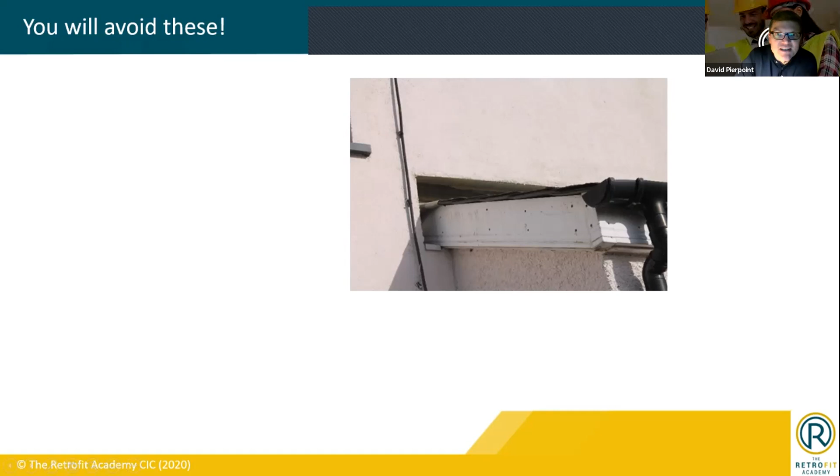And what I always say when giving presentations like this is, if you haven't noticed before, drive around any council estate that's had a reasonable amount of retrofit work done on it, and you will see many of these things. You will see what were bright yellow walls a few years ago slowly turning black, and it's thoroughly depressing. So that's why we have a need for this standard.

Now, I hope you'll just indulge me for a couple of minutes here. I'm going to show you a short video. It's only a couple of minutes worth. This is actually the trailer to something we created called PAS 2035, the movie. And we used this last autumn to, well, we used the whole movie, but this trailer was used to promote a series of clinics we ran with local authorities who have been given a lot of money by government at the minute to invest into retrofit projects. So I think it tells its own story, and we'll revisit it in a second.

Faced with the challenge of a generation, two local authority officers and their contractor have a meeting. At stake, should they adopt PAS 2035 or not? A story of memos, a story of funding, regulations, and concerns about the cost of compliance. About embracing change and building trust. Will they make the leap into the unknown or stick to what they know? Will they ventilate or prevaricate?

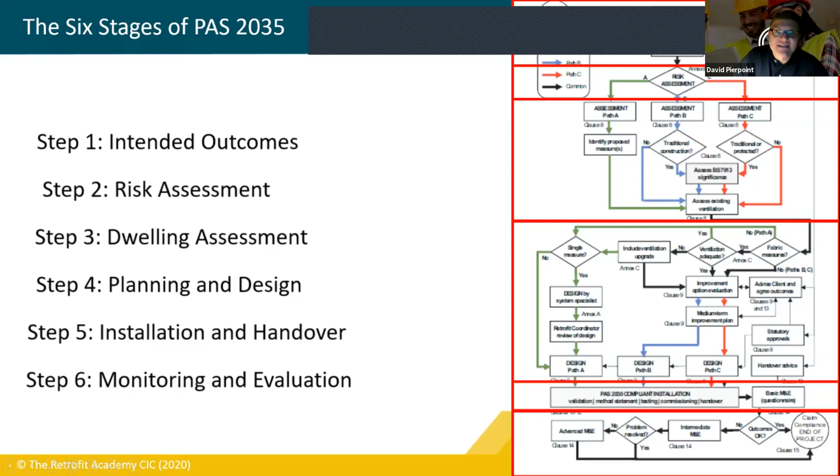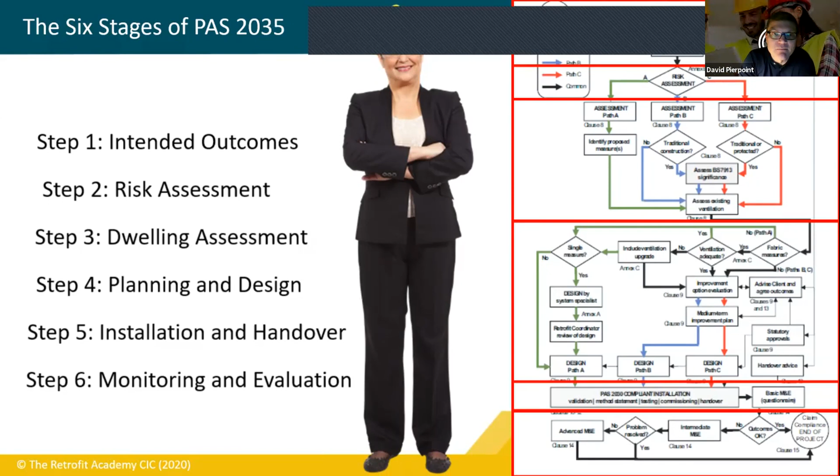I won't go through the detail of that today. It's a couple of hours' worth to do that. But astride it like a colossus is this person. This is Joy, our retrofit coordinator. And it's Joy whose job it is to apply this standard.

PAS 2035 introduces 6 roles that are to be fulfilled on every retrofit project. Some of them are fairly light touch. So a retrofit advisor, their job is to give some good advice at the beginning of a project normally. A retrofit installer, it's their job to carry out the work. A retrofit designer, it's their job to do the design work.

An assessor to carry out the energy assessment, the building assessment. An evaluator at the end of it to make sure it's done what it's meant to do. And then there's the retrofit coordinator character, who links everything together, and I'll explain how. Now, PAS 2035 says that they are a specialist retrofit project manager who takes overall responsibility for overseeing the assessment of dwellings, the identification, specification, and evaluation of energy efficiency measures in accordance with PAS 2035, right?

So it's their neck on the line. It's their professional responsibility. There is an ethos that underpins that, and that is that they act on behalf of the public and the client's interests. So now that is a challenge, to say the least, and it suggests that there's a degree of independence about a retrofit coordinator, which we'll revisit in a second or two.

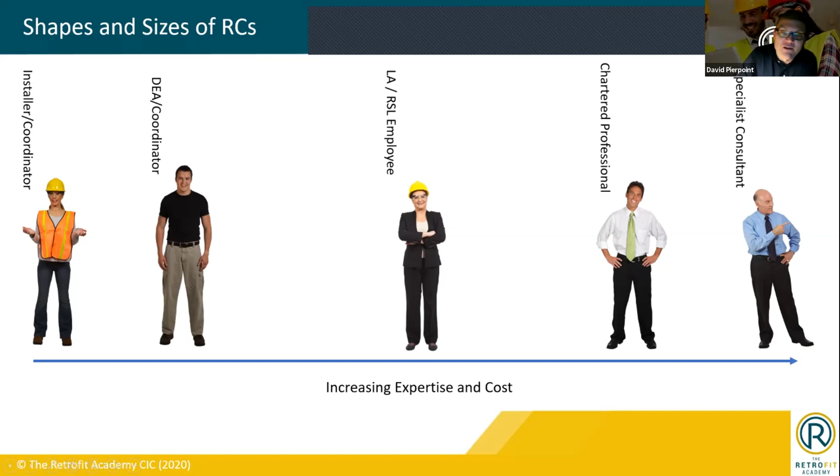And then there's many of you as chartered professionals for whom this role was first conceived, it should be stressed, who really know what you're doing, but you are a bit more expensive because you're in university for 5 years and all that sort of good stuff. And then there's these very specialist people in areas like vulnerable and traditional buildings, but we won't get hung up on them. And then we talked to them about local authority employees themselves becoming retrofit coordinators. So chartered surveyors, architects, and the like who work for local authorities. And we felt that that was a really good option where it was viable.

Okay, so that's the role. That's the information about the PAS. I'm just going to give you one slide's worth on the retrofit coordinator diploma itself before I hand over. So it's a regulated qualification. The awarding body there, the Open College Network West Midlands, that's who you get your certificate from, and they're regulated by Ofqual, which means we're kept on the straight and narrow. The Retrofit Academy is the only provider of this qualification, and we developed the qualification and know it inside out.

It is required by PAS 2035. So there's a section in there that says every project needs to have a retrofit coordinator, and it says that every retrofit coordinator must hold this qualification. And as the only provider of it, I can tell you that we've got around about 800 people enrolled onto it at the moment, and we have 230 or so graduates. So our objective was that by the end of this year, we'd have 1,000, hopefully in practice, not just in training. So a long way to go, but we're making good progress.

Now, we've come a long way. It started off as an excellent course that gives you all the theory you possibly need to know about moisture risk and thermal performance and building fabric improvement, fabric first approaches and whole house retrofit and all these other wonderful things that you need to know about, the building physics and so on. What we've done over the last 12 months is add into that a whole load of in-practice stuff.

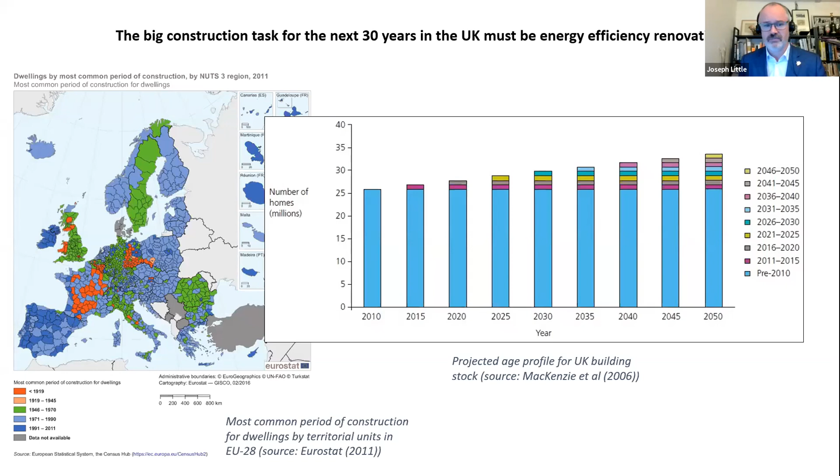We know that the complexity of buildings, particularly when we talk about solid wall, is significant. We're familiar with those heat transfer mechanisms, conduction, convection, not so much with radiation. And then we move to the mechanisms of moisture transfer within our walls. And most of us talk to some extent about vapor diffusion, how vapor moves as a gas through those porous linked structures. And then convection is about air gaps. So it's moving through the air and it can be moving at speed. And of course, that air is carrying moisture with it.

But what we don't talk so much about is capillary action and surface diffusion. So capillary action, where literally the straw or the pore, to use an analogy, is fully filled and liquid water can move really quite fast through it. And then surface diffusion, where, again, to use the analogy, the straw is lined with liquid, but there's also vapor moving through as well. And you can have liquid water moving in one direction and vapor moving in another direction. You can have moisture as a solid, as a gas, and as a liquid in the same wall at the same time, and even the same portions of moisture changing states through the same day.

And places like Scotland, west of Scotland particularly, and Wales and most of Ireland, where there's extremely high and consistent relative humidities, drying is a really big issue. So it's not so much the heavy rainfall. In fact, parts of Italy have much higher rainfalls than Dublin, let's say. But what we have in many places in this western seaboard of the British Isles is this fairly consistently elevated

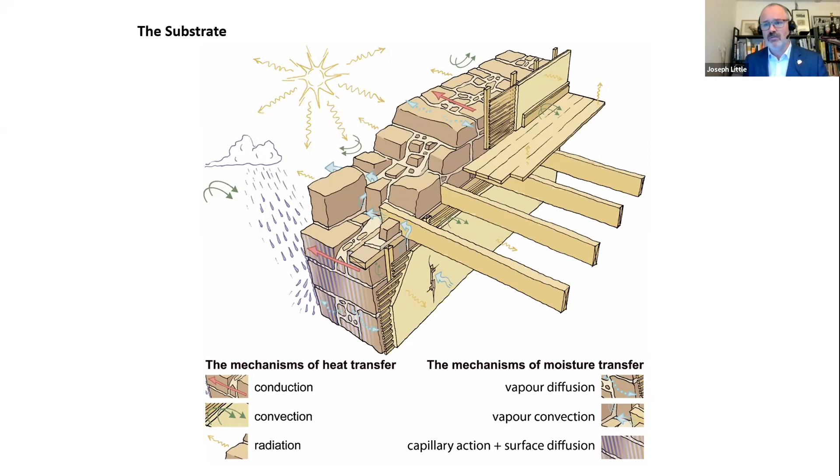And then there's the question of the heritage of the built environment and the quality of those buildings themselves. So there's lots of different concerns we need to think about. And we don't know enough as an industry, certainly building design professionals, about how our buildings are made and what those different mechanisms that affect things are. And a major issue that we want to look at is to ensure that the drying capacity is always elevated above the wetting capacity. And that can be done.

Now, I remember several years ago, looking at a website when I was giving a talk, I think in Scotland the next day, and I came across, in Glasgow, this particular presentation where some community website was very, very proud of the installation work that had been grant aided by your government and that they were carrying out, to such an extent they were showing it on their website.

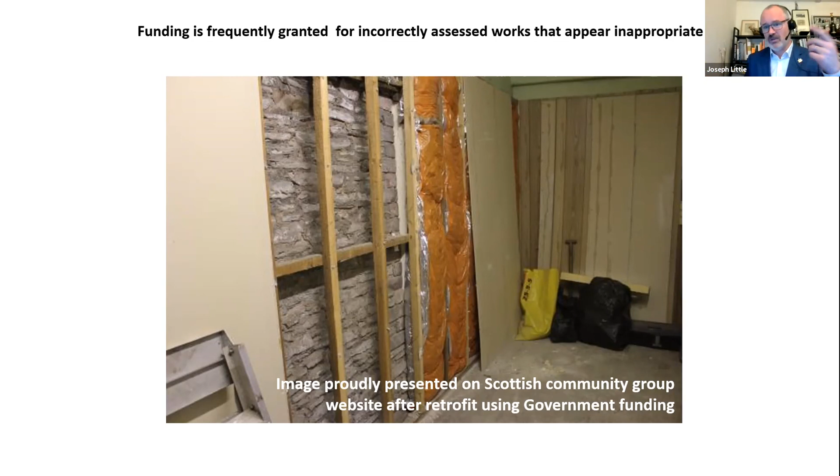And of course, this just looks scary. You've got polythene wrapped mineral wool, foil where maybe foil doesn't make sense, air paths moving around. You've got no understanding of what's going on, nothing consistent. This is an experiment. It may have some value - actually it's so bad it may not be too bad from a moisture perspective, but it won't achieve what it was meant to achieve. And it's a waste of people's money.

We also have that big thing of societal need. This is a slightly old quote: to meet carbon budgets, a further 6 to 7 million cavities, 7 million lofts, and 1 million solid walls need to be insulated by 2020. That was the ambition, 6 years ago. How much of that has been achieved in the last 6 years? I'd say very little of it.

Obviously the Green Deal collapsed since then and other things, but it collapsed because there was a lack of credibility, a lack of safety, a lack of awareness. There were a great deal of accountants involved in that, and lawyers, but not a great deal of technical people.

I'm not going to read all this out, but the implicit assumption behind all this - that all these wonderful people in the Energy Saving Trust, the World Wildlife Fund, the Forum for the Future, Greenpeace, all saying we need to do this right, and we building professionals agree - is that we have adequate information about the solid walls, that we know the right assessment methods, that the right specifiers are in place, and the completed work will always be good. That's the assumption. We know very well, even then, some of us, that there were naive assumptions. But what can we learn, and how can we get it right?

One of the things we could do is understand a little bit more about risk. What's the most risky thing you'll do today? It's probably getting out of bed. You could walk across the road. There's a big difference between risk and hazard. You could walk across the road many times with your eyes closed - I wouldn't recommend it - and you may well live several of those times, but it's very likely that eventually you'll be hit. So the hazard is dying or being injured because you've been hit by the vehicle. The risk is the likelihood of that happening and the significance if it does happen. They're different - hazard and risk.

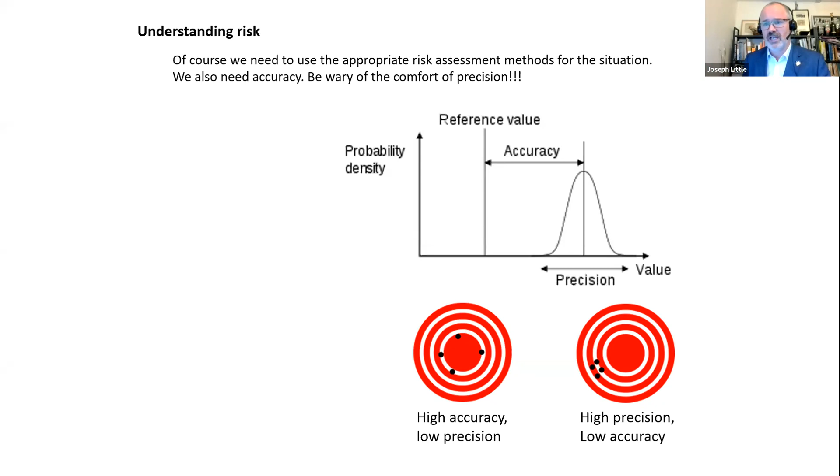So it's not for the retrofit coordinator on site, it is for the building design professional to engage with. As it happens, there is loads of guidance. Before about 2011, it was a desert to some extent. But look at what's been done by the STBA—the Knowledge Guidance Wheel, Responsible Retrofit, the Bristolian Guide, which is so wonderful, the guide I pushed out myself with my colleagues Beñat Arregi and Calin Ferraro before I came into TU Dublin, written in a context of uncertainty for Scotland, with a stone wall tenement in question.

Other things—Colin King looking at uncertain consequences, unintended consequences, and Sanders and May's wonderful document, God bless Neil May. Some of you may not know him, but he was a bit of a mentor for me, and he died a few years ago, but he was the lead author of this and so many of the other documents on the page.

And then other documents from a conservation perspective. It's interesting that PAS 2035 references BS 7913, from 2013, but doesn't reference, from what I can see, BS EN 16883, which is more recent, from 2017—Conservation of Cultural Heritage Guidelines for Improving the Energy Performance of Historic Buildings. I think that's a pretty good one to be looking at.

So that kind of guidance is not regulatory, but it's really sober guidance. What's really important is all of it comes from a building physics perspective, an applied building physics perspective—not for the physicist, but for the design professional who needs to understand this sufficiently. These documents are all coming at it from the same way, and the reason I say that is the previous generation of documents in many cases weren't.

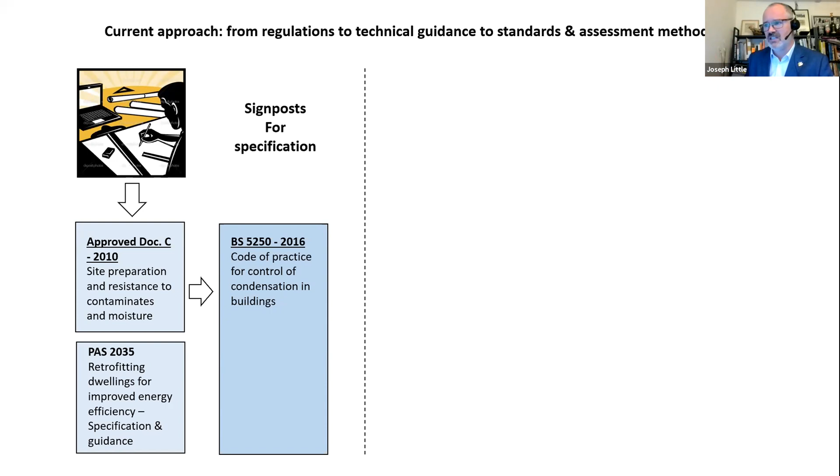So in that context of pathways, if you look at the bottom left-hand corner there, you've got PAS 2035, and there's that question - the specifier at the table saying, what do I do? What's safe? What's reasonable? And where do I look? So I imagine you might look at approved document C, or PAS 2035, or you might go across to various documents such as BS 5250. At the moment 2016 is the latest version, 2019's draft, but that might point you at different types of risk assessment - you could say there's 4 different types.

What I should say is simplified is not a simplified version of full. Simplified is talking about dew point or Glaser. It could say chalk, and full could say cheese. In some cases they could both say camembert and whatever brie. So you can't say one is a simplification of the other. But at least in the 2016 edition, for the first time, they actually said there were 4 different methods you could use. And in air dominated cases, by the way, all desktop risk assessments are abandoned, because none of them capture the significance of what's going on.

So there's guidance where it's prescriptive, and that will always be necessary, and it can be very good when used within its limits. The Glaser method under BS EN 13788 is excellent. For years I was very critical of it, but I've come to realize it's excellent when used in the context of the scope, which is on page 4 of the document, and it's limited. So use it within the limits and it's fine.

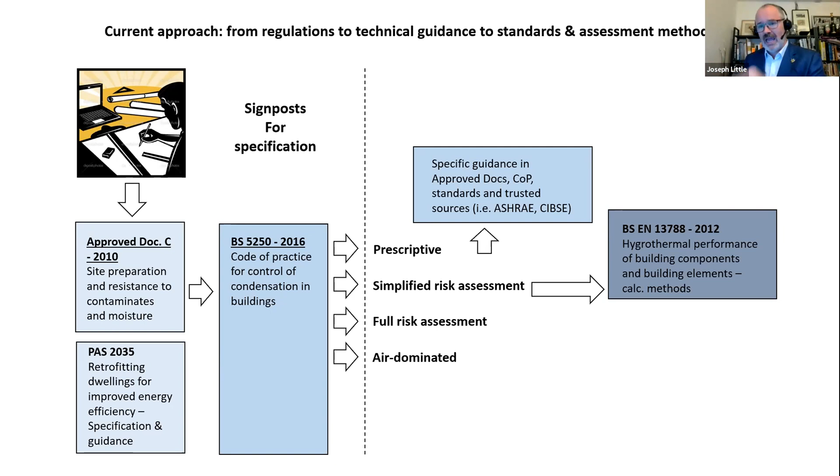The problem was, since about the 1920s, the only risk assessment methods in the building industry were the dew point method, which had all its limits. Those limits weren't fully understood, and it was used for everything. That's the problem - it's still being used far too widely, way beyond scope, and too many designers still do not read that document and establish on page 4 the scope.

So there's a thing - 15026 came out in 2007, but it was only referenced by BS 5250 in 2016. So there were 9 years where buildings were being built where the builder was saying, or the material supplier was saying, we're assessing the product in accordance with BS 5250. And that was cheeky because this standard existed, but it wasn't properly signposted in BS 5250 in that period, and people could therefore get away with it where a building design professional didn't know this themselves. So at least that's now been much corrected.

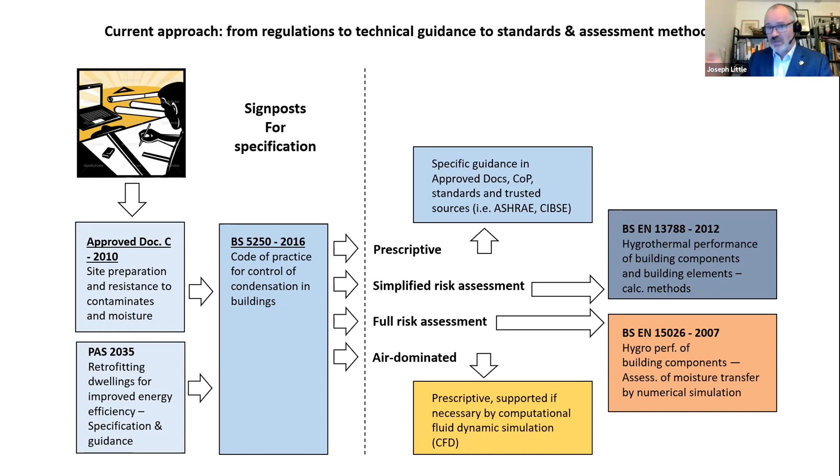And then finally, prescriptive - are you into computational fluid dynamics and so on. So these are the signposts for specification that you need to be very aware of. You don't always need to go with WUFI - you need to go with the right method, the appropriate method within scope that meets the timing and whatever else you have. But if you need to go with WUFI or dynamic, that's what you need to do. You need to do something that you can stand over.

So the Glaser method - I won't talk a lot about these things - it's about charting the temperature profile, the saturation profile, and then the actual quantity of moisture present and so on. Where they touch, you've got liquid water, Tauwasser in German.

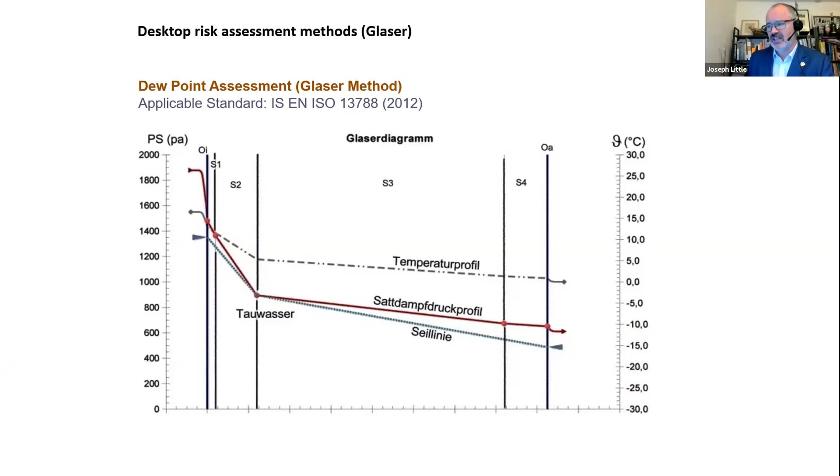So that used to be done on a slide, literally on a drawing board, and dots were charted and literally lines were drawn. It went back to that kind of really sensible, robust, but very limited assessment. It's a calculation, it's not a simulation. That's important. You now can, under IS EN 15026, carry out, I wouldn't say it's a simulation, it's not a dynamic simulation, it's a numerical simulation. So it's a calculation for every time step.

And you can set up different cases very quickly. You can see on the red area of that brick wall there, monitoring positions being introduced. You can throw things around very quickly. You can introduce your own material files. I'm showing you a screenshot of WUFI, but Delphin is a bit more complicated, but is also validated to that standard. It allows you to take account of the orientation, the inclination, different climate events, local climate issues. It allows you to take account of failure.

So, there's a break in a window reveal wall seal. What happens if a certain amount of driving rain gets in there? What happens if the airtightness membrane isn't perfect? All those sorts of imperfections and conditions, construction moisture on the day that the racking board was laid, or whatever, all those things you can actually allow for and assess parametrically.

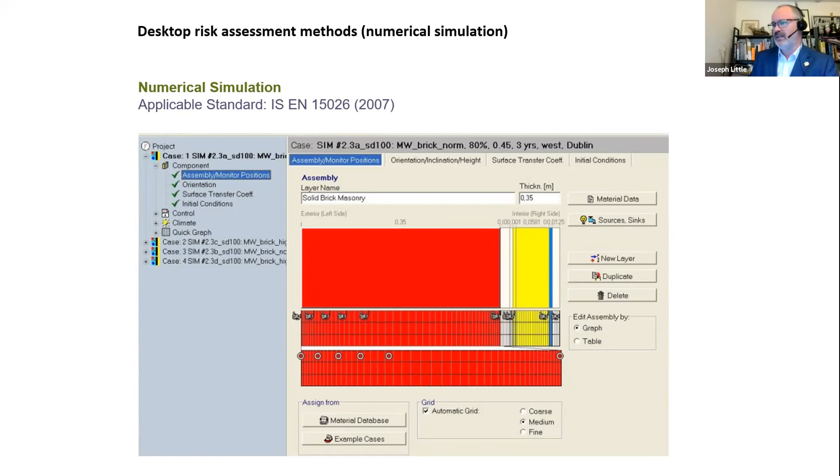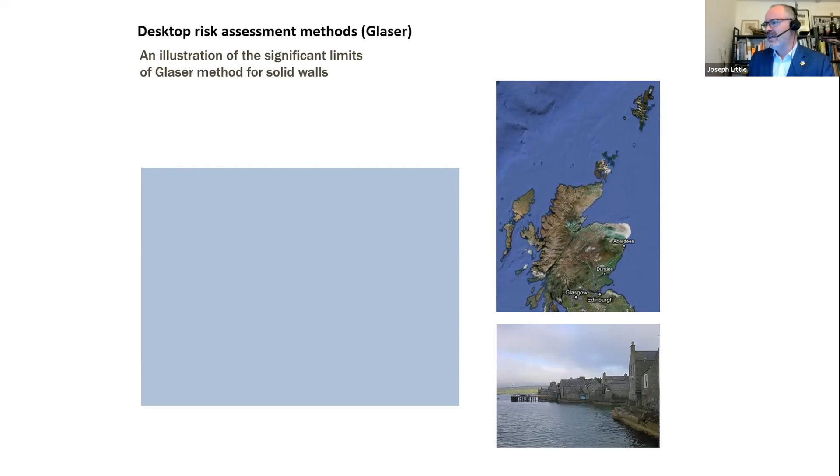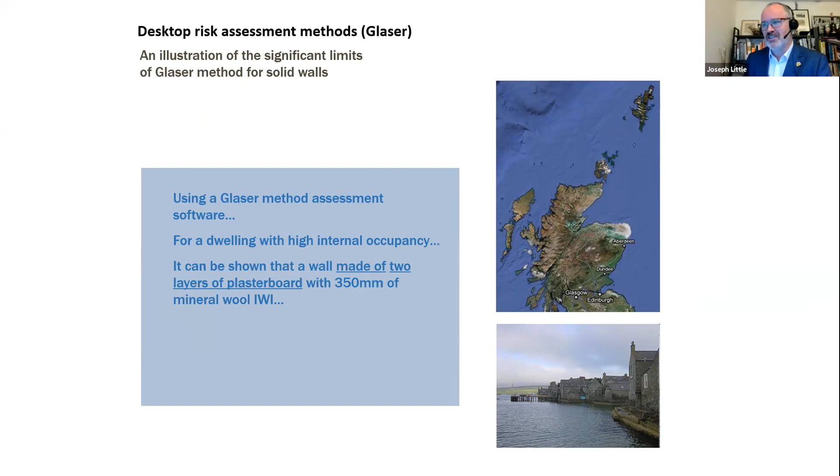Compare that to the dew point method, and I love this example, which is a bit mean, but you've got, I think, Lerwick in the Shetland Islands, in the north of Scotland. If you took a Glaser method or a dew point method calculation and you looked at a building with high internal occupancy, it could be shown that a wall made of 2 layers of plasterboard with 350 millimeters of mineral wool, so this is silly, I know this is silly, will actually pass a Glaser method calculation if it has a VCL on the room side.

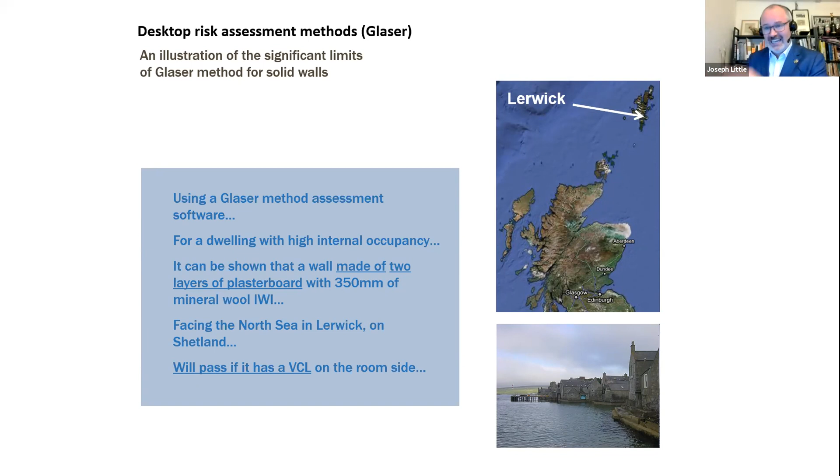And that's because a Glaser method calculation only takes account of the moisture from inside. It takes no account whatsoever of the moisture outside, other than its relative humidity outside. Rainfall does not exist in a Glaser method calculation. Radiant sunshine does not exist in a Glaser calculation. Only ambient conditions in temperature and humidity, and then obviously the conditions within that material buildup itself. So that's not valuable, that's not useful, that's dangerous. To be able to say to somebody that that's going to be a safe buildup when clearly it's a dreadful buildup and will collapse.

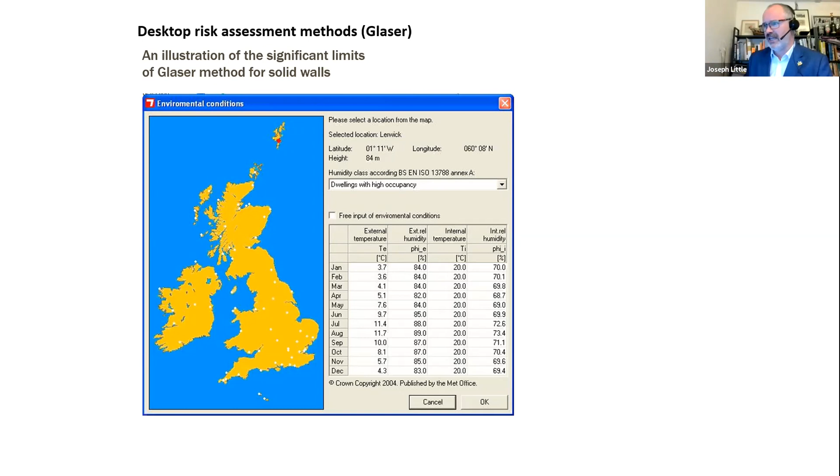Just to kind of prove that, I'm using a bit of software. It happens to be BuildDesk. Like I said, it works fine when it's used within its limits. There's a dwelling with high occupancy. There's Lerwick at the top of the screen. There's the external or the boundary conditions, internal and external. There's the wall assembly, all properly chosen according to those material characteristics. There's the risk assessment. There's no moisture accumulation.

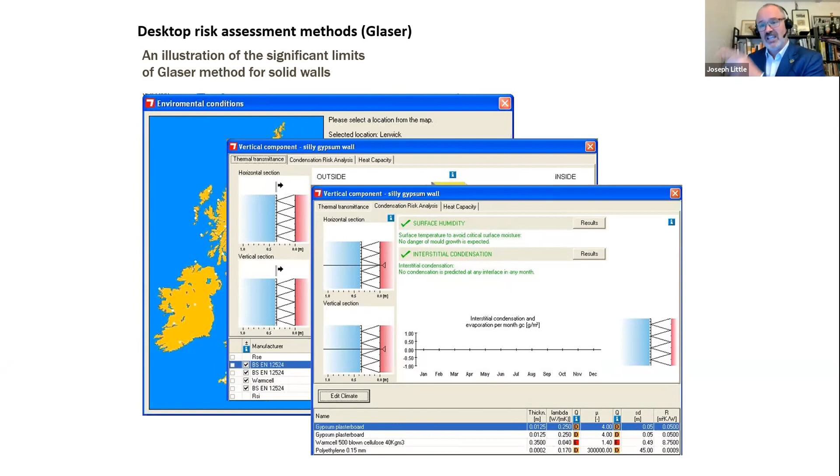The bar you're seeing horizontal at the bottom of the screen there shows a position for every month, and it shows there's no moisture accumulation, therefore there's no drying. This is perfectly safe, as far as that calculation is telling you. No condensation is predicted at any interface in any month. Computer says yes, computer says no. It's nonsense, but it's actually used every day by most people doing most risk assessment in the British Isles.

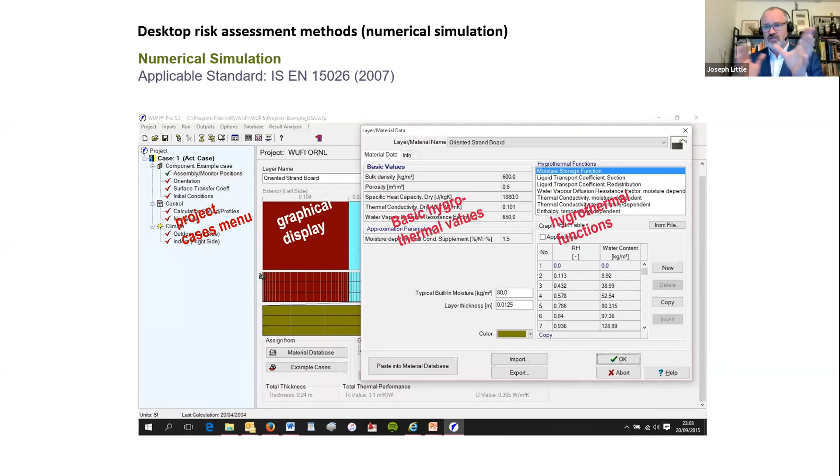So going back to the WUFI interface, there's an awful lot of things you can do with that. There, like I said, the project cases, the graphical display, the hygrothermal values, the hygrothermal functions. So a function is something that changes with time or changes with how relative humidity affects moisture content, how temperature could affect the thermal conductivity, all these different sorts of conditions that have a dynamic characteristic. So you can look at all that. Like I said, inclination and orientation and exposure, all those things can be mapped.

It's also important to be aware that there's a wide range of material characteristics. Building materials vary. They can vary from the same quarry, but let's take that out of it. They could be widely different in terms, let's say, of their moisture storage function, which is a huge capacity, and let's say the water absorption rate. So how quickly does it wick in water during that rainfall event, and what's the capacity of that fabric to store that moisture? There's just two characteristics.

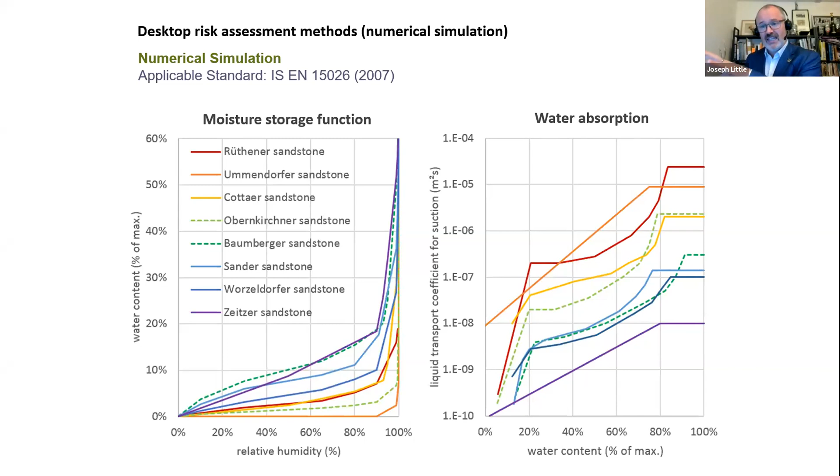You can see the variety of values in measured materials. It's so important that we get UK materials measured in this next period. And actually there is, I think Professor Philip Banfill, isn't it, is doing a study at the moment for Historic Environment Scotland, where he's doing some measurements like this for Scottish materials, which is great, but we need a lot more of that kind of thing.

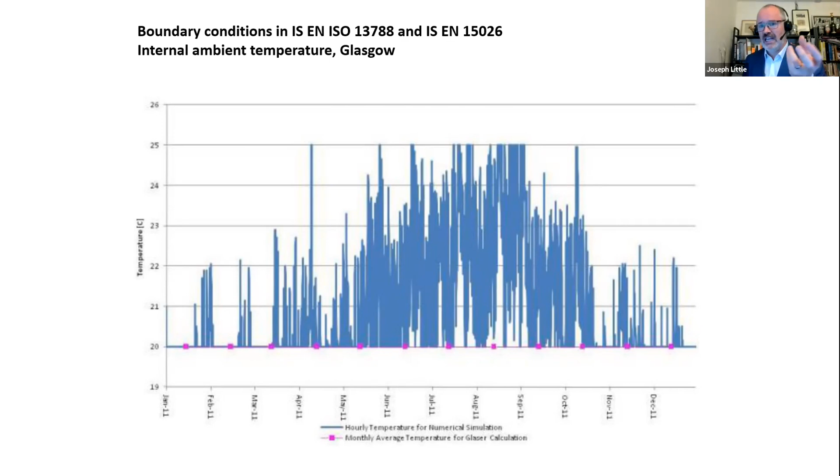So again, you're using assessment methods which take account of some level of reality. It's not computational fluid dynamics. It's not reality. It's a simplified version of reality, but hopefully it's sufficiently close that you can do good things. So here's a very quick case study. I'm probably beginning to run out of time.

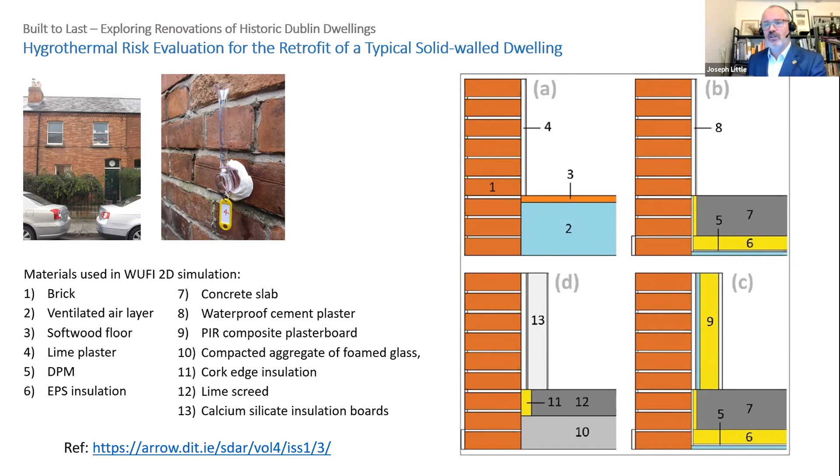This is available in the link at the bottom of the page there, but basically we took physical measurements using the Karsten tube of a particular very common red brick, one brick thick red brick house in a place called Ranelagh in South Dublin. We looked at the original condition when it was built in 1905, the condition it was in when we saw it, and the typical retrofit that would get grant aid, and then another retrofit which we felt would be also well insulated, but would bring it back to a better level of moisture management. So I'm not going to talk about the details.

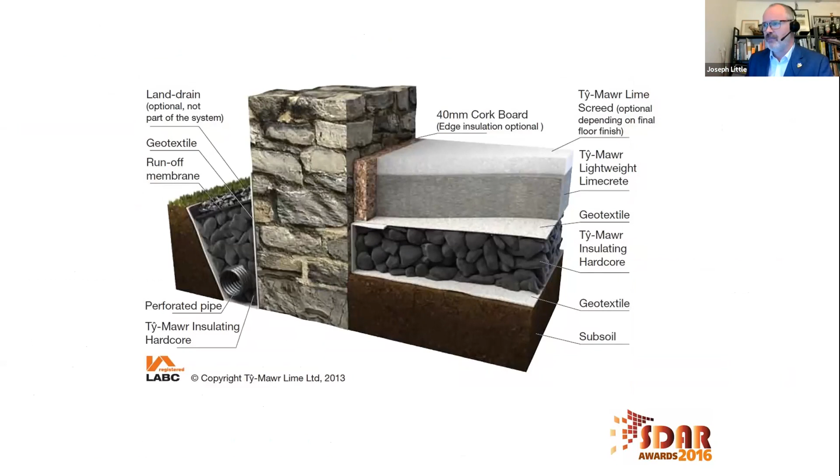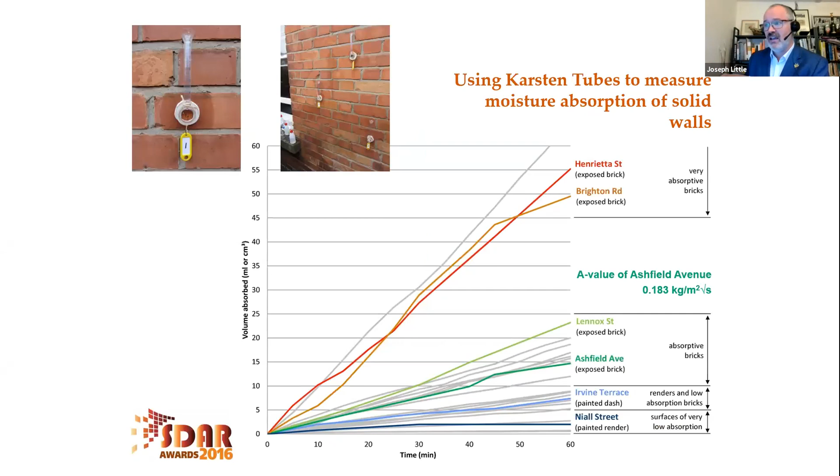Having done the physical measurement, we were able to select values in the WUFI database, which is expanding and is really large, that best represented the measured values. So we were starting with a hypothetical desktop study, which was at least linked in one of the highest levels of risk, in this case, water absorptivity, to reality and that particular building. And that study on that wall, by the way, took 1 hour, and maybe a bit of an hour graphing something in Excel afterwards. So well achievable, and then feeding that in a robust way into a parametric study.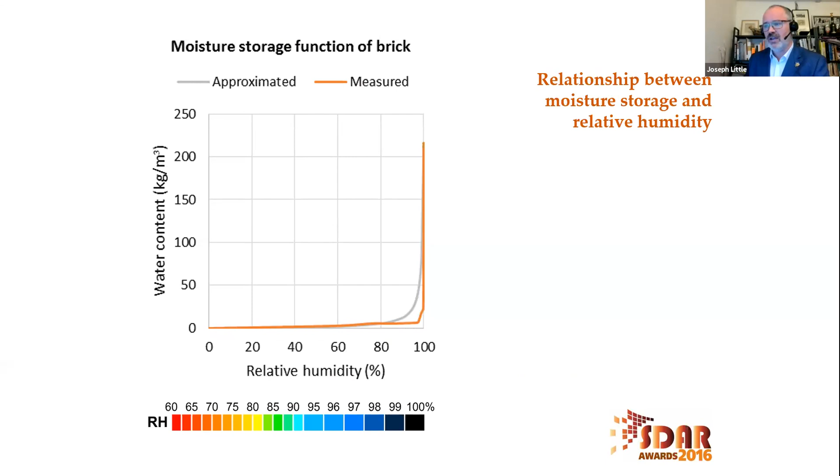WUFI, I won't go into the whole thing. This is WUFI 2D, which is more complex, but there's a whole dynamic time step. So for every step, two equations are solved against each other, and then you move to the next cell and the next time step, and some of the inputs for the new time step are from the outputs of the last time step, and so on, on your cells going from inside to outside in these equations.

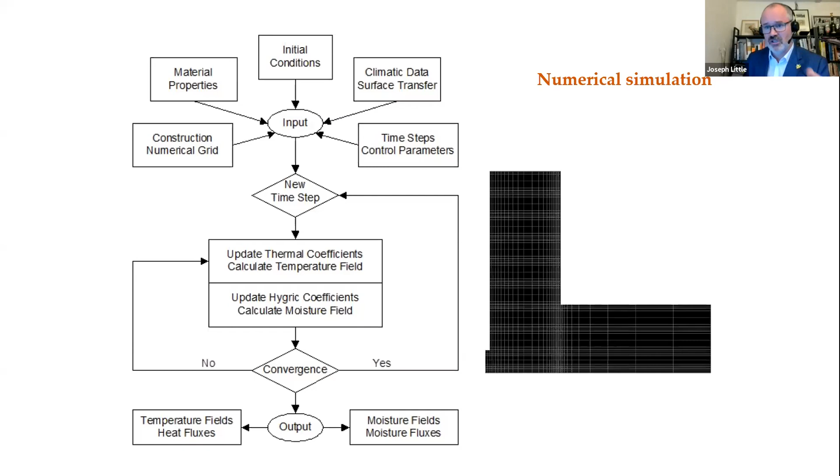So they're numerically heavy, and they really only became possible when processors became cheap in the last 20 years. Where we looked at that particular wall, you could see, and this is just a moment in time, black represents very, very wet.

Red represents really quite dry, really low relative humidities, like 60%, relatively low relative humidity. And just visually, if you let it wash over you, if you look at the original condition during a driving rain event, during a drying out period, and during the driest period we could find over the final year in a 3 or 4 year simulation, you can see that the moisture is always greater at the bottom.

You can see that the wall has the ability to dry out, and there is a process going on, and it takes some months. It's not necessarily a quick process, and the middle of the wall can be wetter. And if you look at the current condition where they tanked the inside face and they put in cement pointing instead of the lime pointing, and they put in a DPM where they blocked moisture from drying into the room, into the floor from the base of the wall, you can see that the current condition has a somewhat elevated risk compared to the original, where the original had a suspended timber floor.

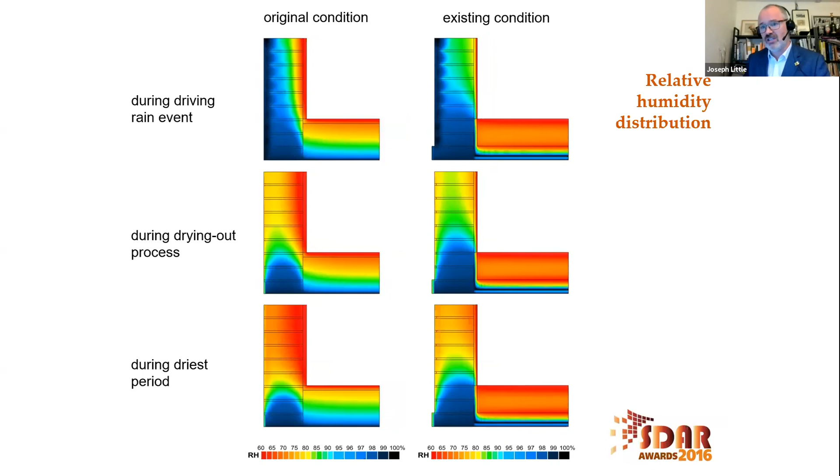And if I move on further, the three lines on the left is the one that attracts the mainstream retrofit grant. So what we're grant aiding, what our tax money is paying for, is the one on the left. Compare that to the original, compare that to the current condition, and compare that to the one I'm proposing on the right as a better compromise. But it's the one on the left that gets the grant aid at the moment in Ireland, let's say.

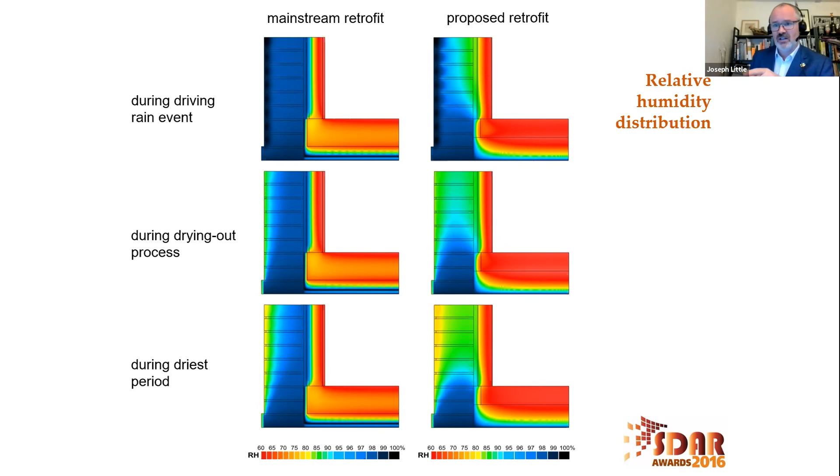And then the one we're proposing: take out the tanking, take out the DPM, replace the lime pointing, put in a capillary open insulation strategy that's fully bonded, and put in the foam glass aggregate with the limecrete slab and so on below that, and let's see what happens. And it's still elevated. It is now warmer, and retrofit does raise risks, but these risks are much more appropriate than the left condition, which is the kind of just slap the stuff on, don't talk about it approach.

And then if we're looking at that particular black spot in the 4 different images on the left, you can see that the blue line is what we had there. So at that particular junction, which a thermal modeler would immediately zone in on, we had a much lower relative humidity there in blue. And the condition I'm proposing as an improvement that's also renovated, that's also insulated, is the green. So it's quite a bit more elevated.

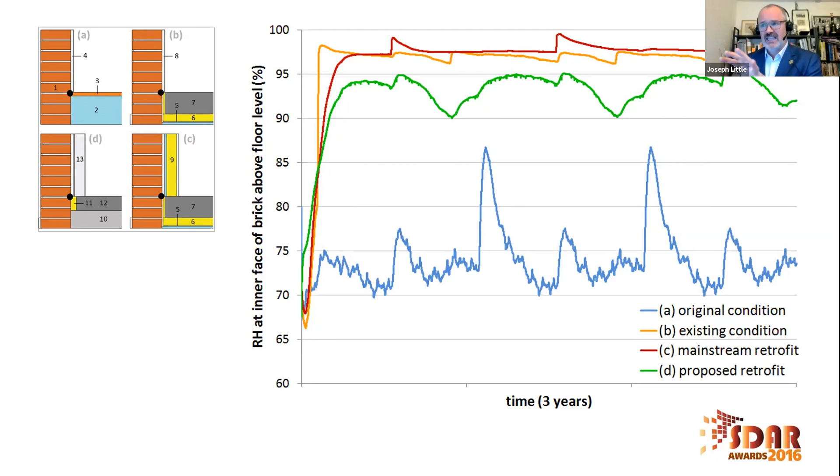It's quite a bit higher, but at least there is some level of drying going on. And for reasons I won't bore you with now, that could still be okay. It's to do with moisture storage functions and so on. But if you look at the red line, you're moving from 97% into 99% relative humidity on an ongoing basis. And it's very problematic. So this is the kind of value: you begin to see these things, begin to make these kind of judgments.

So upskilling for building design professionals. I've only put these slides together quickly, so apologies if they're a bit rough. But I've been offering with the Fraunhofer Institute for Building Physics, that invented the WUFI software in the first place, and they're lead authors in the standard and so on. They're key people in Europe. We teach what's normally a 2-day event with the Green Register for Building Professionals every year. Sometimes we've done that in Bristol, sometimes London. In the past, I taught in Leeds and Glasgow and so on.

And this year we did that online on the 20th of November 2020. We taught 3 webinar events over an 8-day period. It was the first time we'd done that online, and it allowed us to have people from around the world. And it still gives you a good insight into specifically the use of WUFI. So it was limited to that, but it also brought in an element of the building physics, the risks, all these sorts of things, and it got people started in the space of sober risk evaluation.

This offering here, the CPD certificate in hygrothermal risk assessment, is an academic qualification. It takes place over 6 weeks. It's 100 learning hours. It's still for building design professionals. It's online. It's very flexible in terms of when you're engaging.

There's webinars and so on. I'll show you in a moment a little bit more about that. And that started last Friday, so it's just gone. And Alex actually went from the 8-day event with us, Alex Little, who's hosting this event, and is now attending the 6-week event with us.

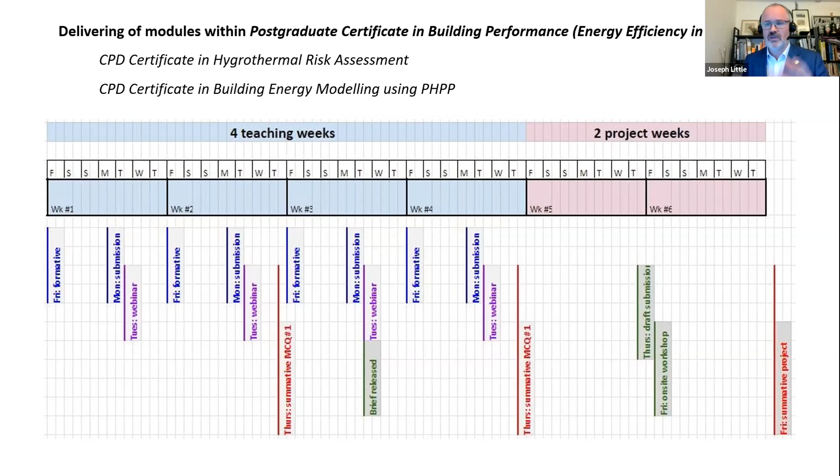Right. Joseph, thank you very much. I can't actually share my screen at the moment. Alex? Do you see the screen? Yeah, what's it say at the very bottom? Host disabled participant screen sharing. Oh. I think. Try that now, John. Yeah, that's fine. Sorry about that. There we go. So hopefully everybody can see that. Yeah, that looks good. Great.

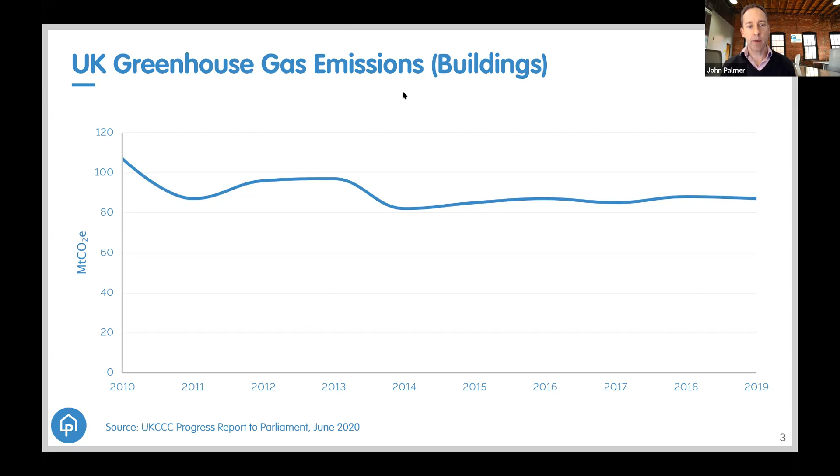So that just puts the overall picture into context. Yes, we've got a lot of heritage buildings, but we've got a lot which aren't as well. But even in the unconstrained, if you like, the non-heritage buildings, there will be ones where we're going to need to adopt a sensitive approach to retrofit.

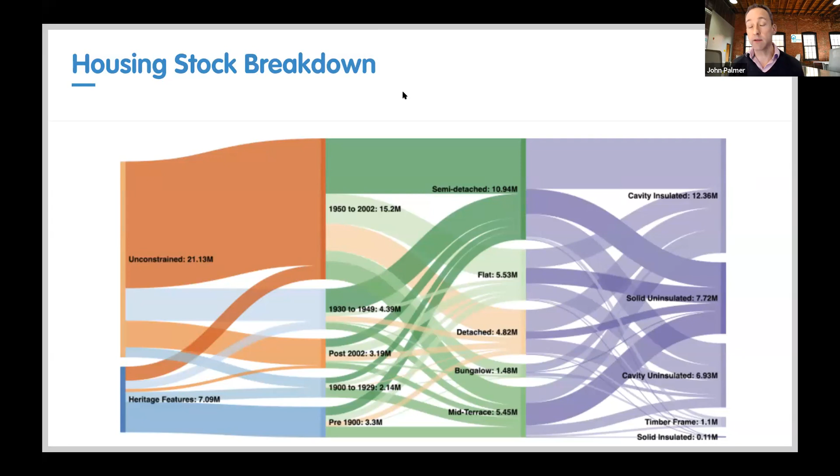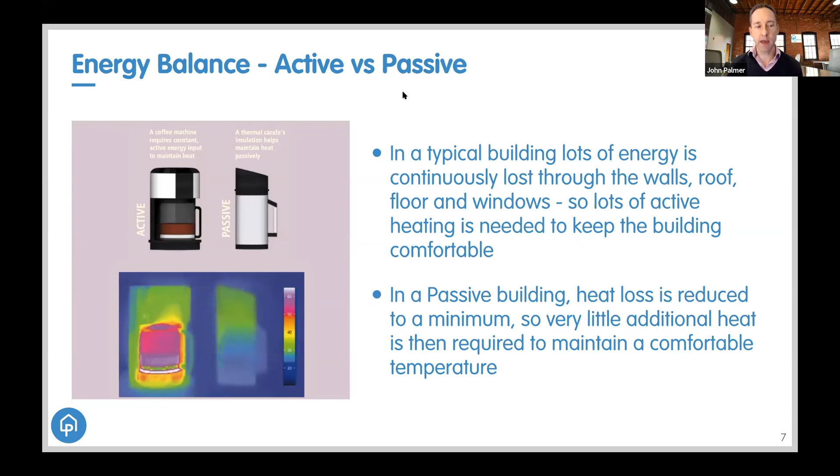So what is Passivhaus? Well, I haven't got time to go through it in detail, and I'm sure many of you are familiar with it, but really it's this approach, which is you can keep your coffee warm on your hot plate, or you can keep it warm in your insulated carafe. And if you keep it on your hot plate, you need to pump energy through it constantly. So that's the principle: keep the energy in rather than having to put lots of energy in to compensate for what you're losing.

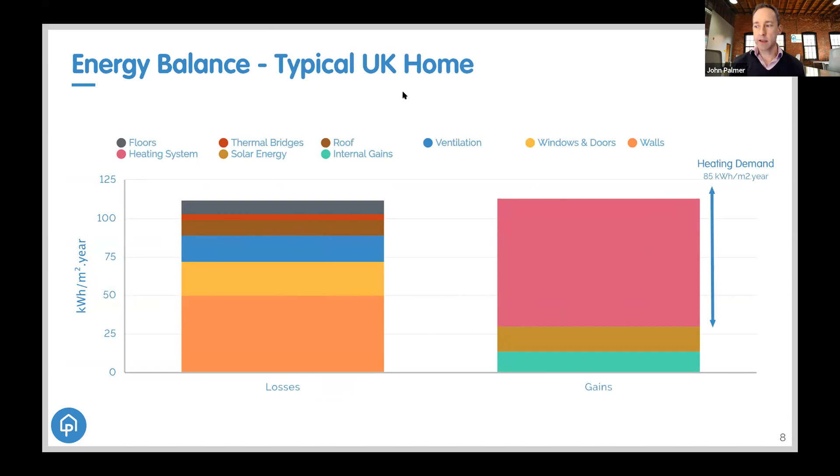In a typical UK home, we've got a situation like this where we've got all those losses through various parts of the building fabric, floors, walls, etc. And then we've got gains of solar energy and internal gains, things we do, cooking, washing within the building. And then the pinkish bit is what's left, and that's what your heating system has to provide. And in a typical new build in the UK, including a performance gap, we think it's around 85 kilowatt hours per metre squared per year.

What a passive house does, this is a new build passive house, is squash down those losses, and I've left the scale the same here, which means that if your solar and your internal gains stay approximately the same, the heating demand comes down to something really, really small, and that has to be 15 or less for the Passivhaus standard, and that's the kind of magic number we try and get to.

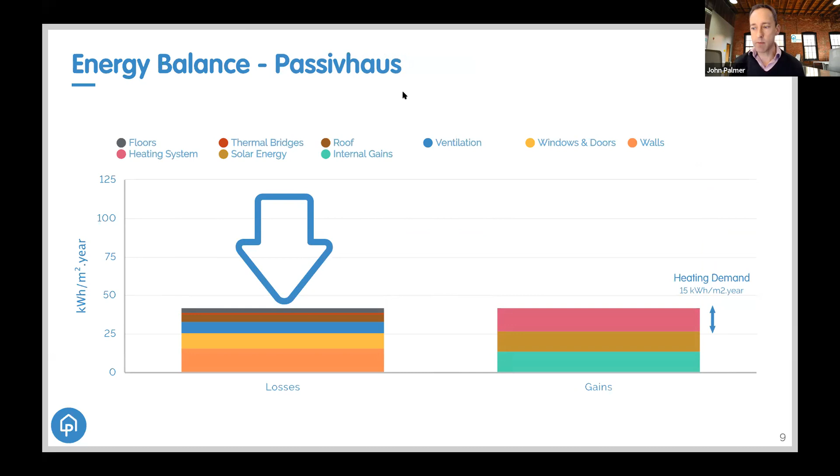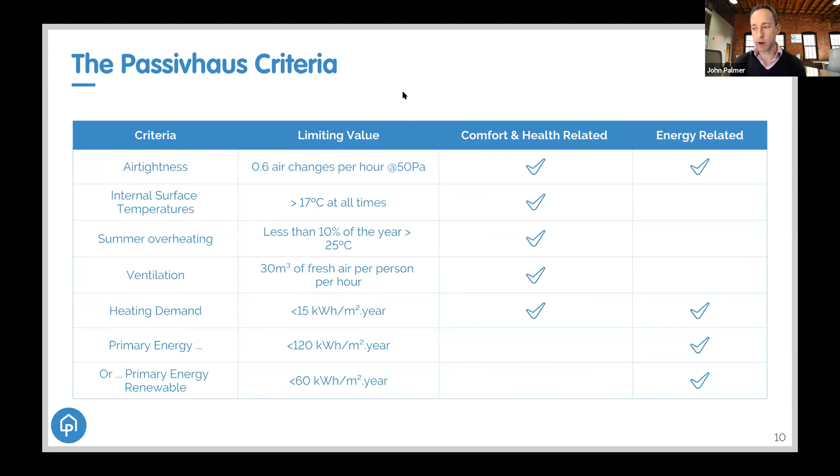But there are also some other criteria which are not necessarily related purely to energy, and you can see here that Passivhaus is also a comfort standard, and this is really important because many people I know who live in passive houses, who started their journey from an energy efficiency point of view, the first thing they say when you talk to them about their passive house is how great it is to live in, in terms of air quality, comfortable temperatures the whole year round, just a great living environment, and that's where a lot of these criteria have come from. And what we also need to consider is the way all this fits together. So we've got these criteria, which I've just shown you.

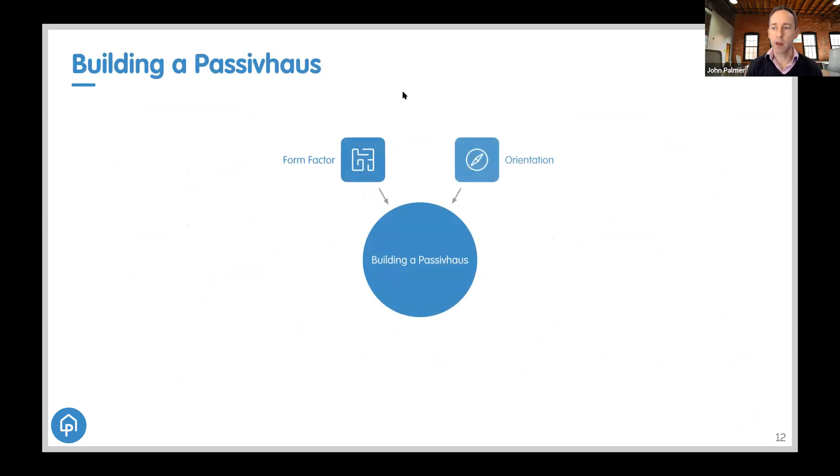So, building a passive house, I'm going to talk very briefly about these topics. Let's start off with form factor. Form factor is really the efficiency of shape of our building.

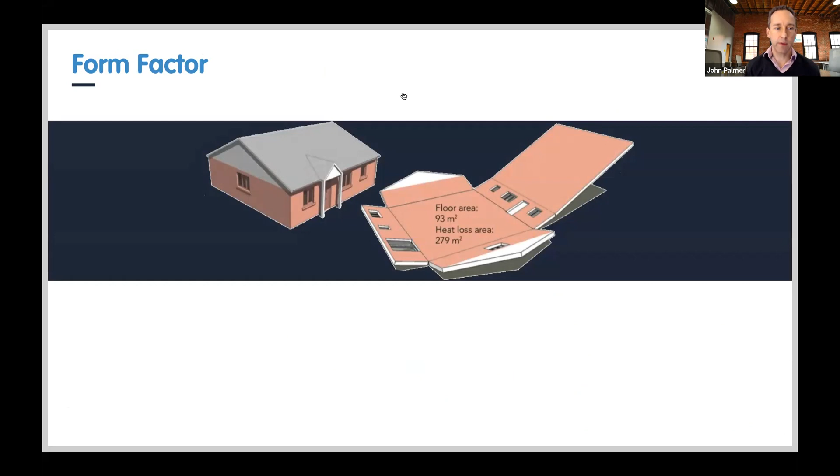So we've got a building here, which is a single-story bungalow, floor area of 93 meters squared, but lots of heat loss area, 280 meters squared, as opposed to an apartment, which has got the same amount of usable floor area, but it's got 4 times less, or slightly less than 4 times less, heat loss area. Now yes, the flat above will have a heat loss roof, the flat below a heat loss floor, but overall the efficiency of a multi-story compact shape means your insulation, your fabric, has to work less hard.

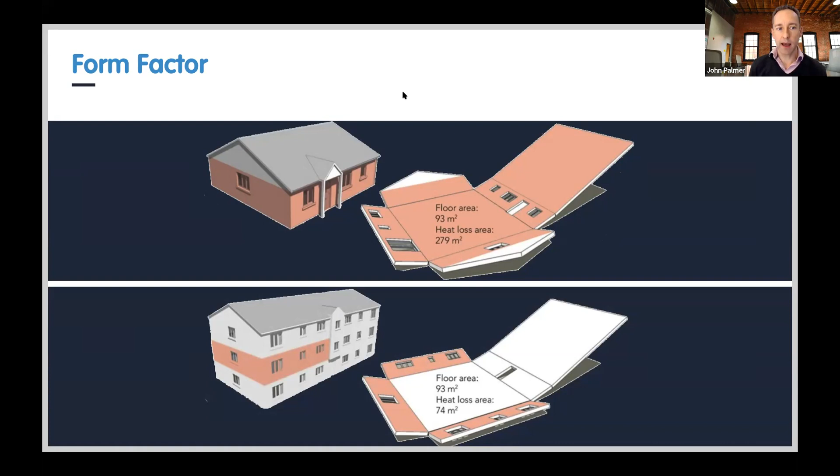So the top building there, we're going to have to put 4 times as much insulation in just to get to the same levels of performance. So you're making the job hard for yourself before you even start with a very poor form factor. And this just illustrates that.

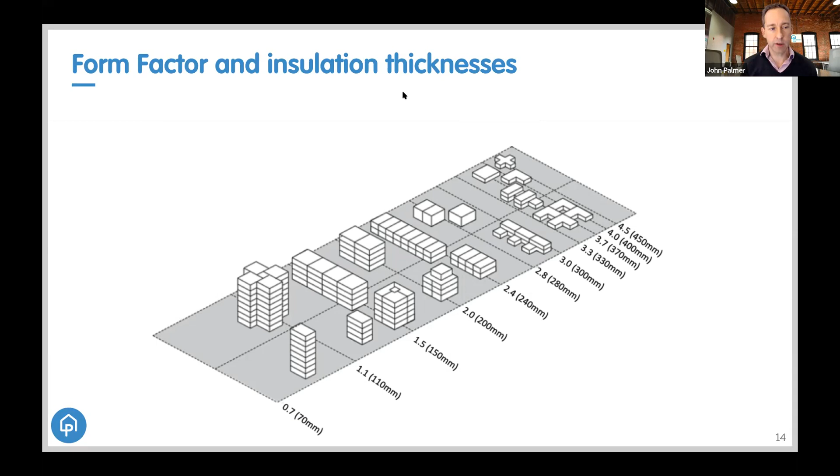You can see that to attain passive house gets really difficult in poor form factor buildings, needing 400 mil of insulation, whereas at the other end it's almost the same as building regs. So form factor is really key to get right before you even start, and it makes everything else easier.

The other key point is orientation. These two, form factor and orientation, aren't really anything about passive house specifically. They just make the job easier because they make things more efficient.

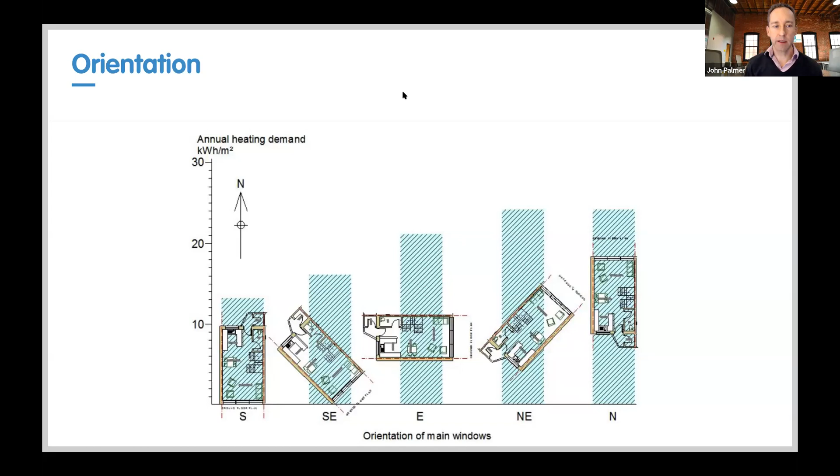Moving on to what you might think is the obvious part of passive houses: continuous insulation. We obviously want a good amount of insulation. We typically allow for a total construction thickness of 500 mil to start with for a passive house in the UK, and we want to wrap the whole building in this tea cosy.

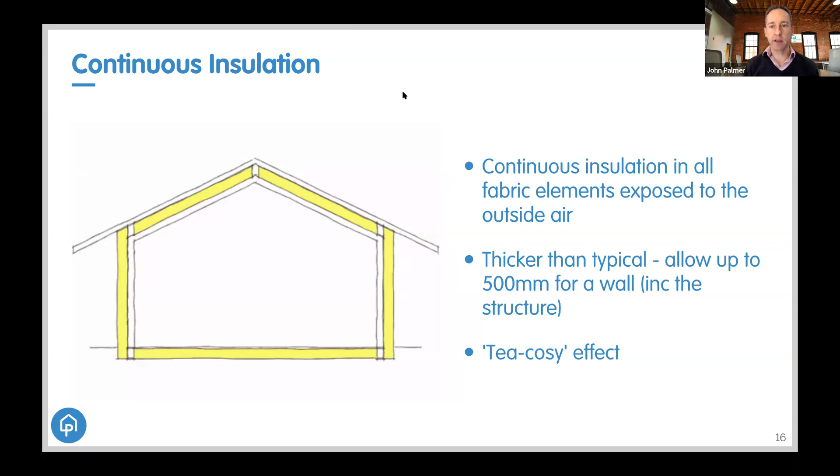And you would be amazed how often that doesn't happen in typical construction. There are weak points, there are gaps. In particular, you can see there are gaps where the structure penetrates the insulation there, and what we need to do is eliminate those. Those are our thermal bridges, where there are discontinuities in the insulation layer.

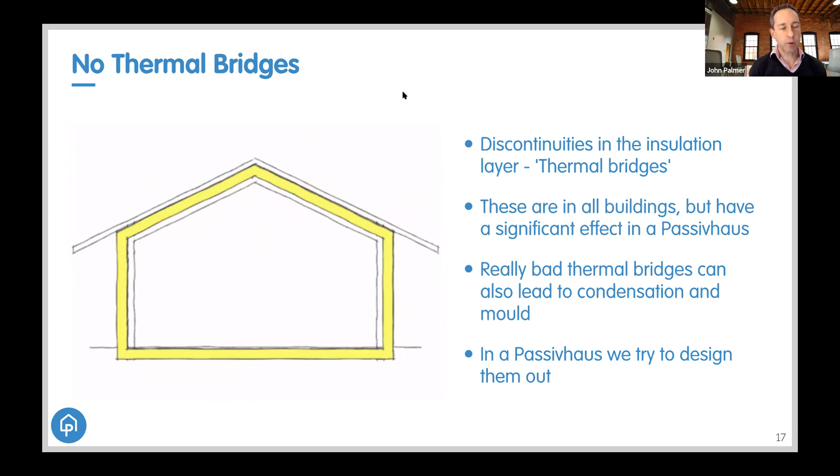They are in all buildings, but by the time you get to passive house levels of insulation, they have a major effect. They can also lead to some of the things that Joseph was showing earlier, which is condensation and mold, because they've got very low surface temperatures. So in passive house, we try to design them out, get rid of them from the start, rather than compensate for them.

We also need good quality glazing. Glazing is a double-edged sword: it lets solar gain in, but it also lets heat out, and it can let too much solar gain in and lead to overheating. So for the UK, in a passive house situation, we'll use triple glazing, because that gives us a much higher level of performance in terms of heat retention. We'll also probably have some kind of shading to address the overheating risk.

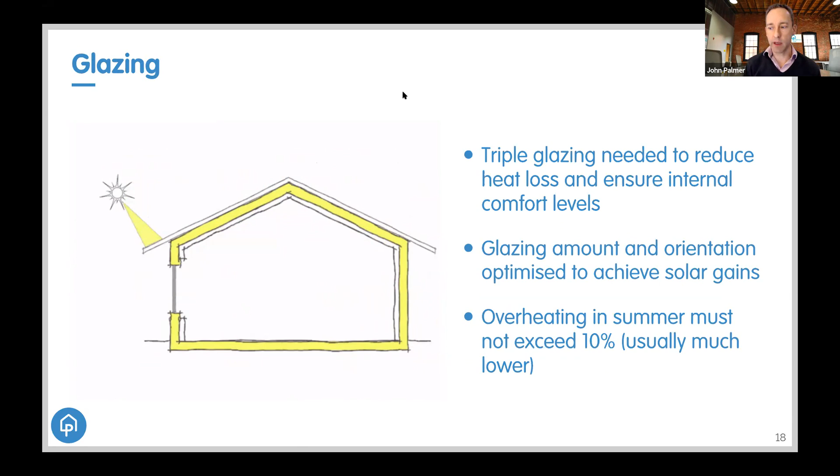We need our buildings to be airtight. This is for a couple of reasons: it's for comfort, in terms of no drafts, and it's also from an energy point of view, because we don't want cold air coming in and displacing the warm air we've heated up. So 0.6 air changes per hour at 50 pascals is the passive house standard, which is roughly 10 times or more better than the building regs average, which is around 5.

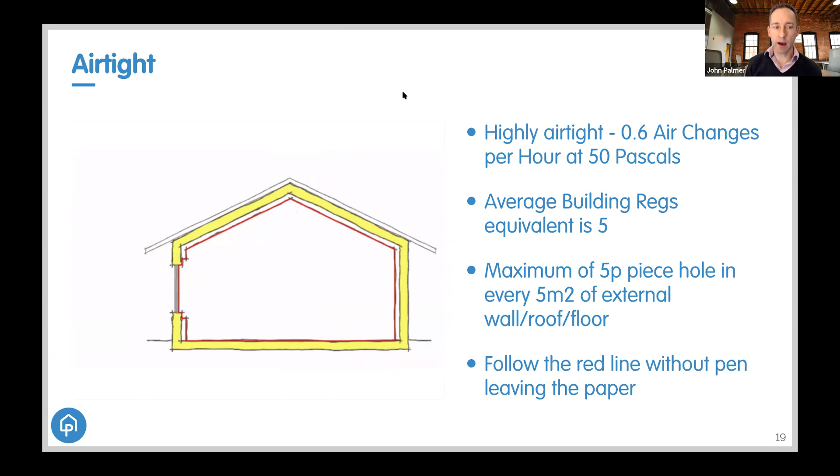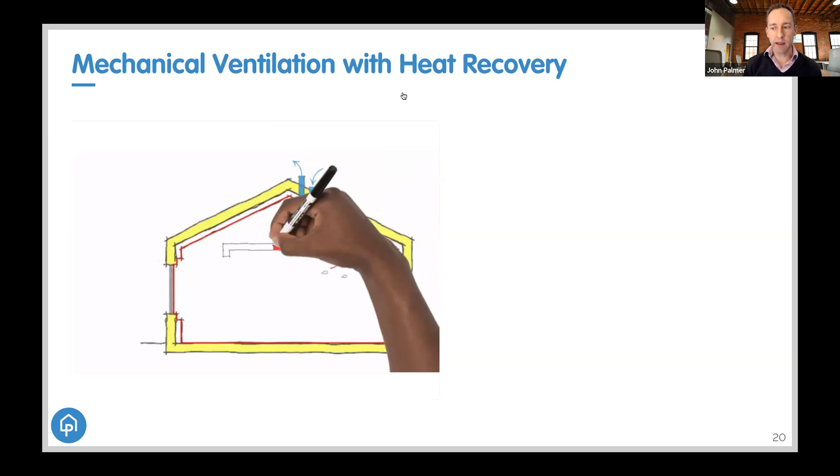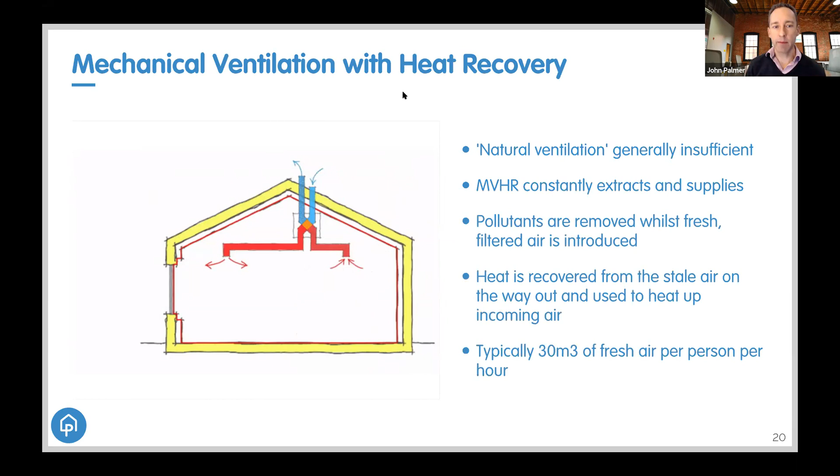And finally, we've made our building airtight. That's great from a comfort and energy point of view, but not good from an air quality point of view. So what we then need to do is put in a mechanical ventilation system, which will constantly extract our stale and humid air and constantly supply fresh air. I've got one of these in my house - it's fantastic. What it does is give you brilliant indoor air quality without the penalty of having to open your windows. So it's good for health, but it's also good for energy.

So that's a very, very quick run through the principles of passive house.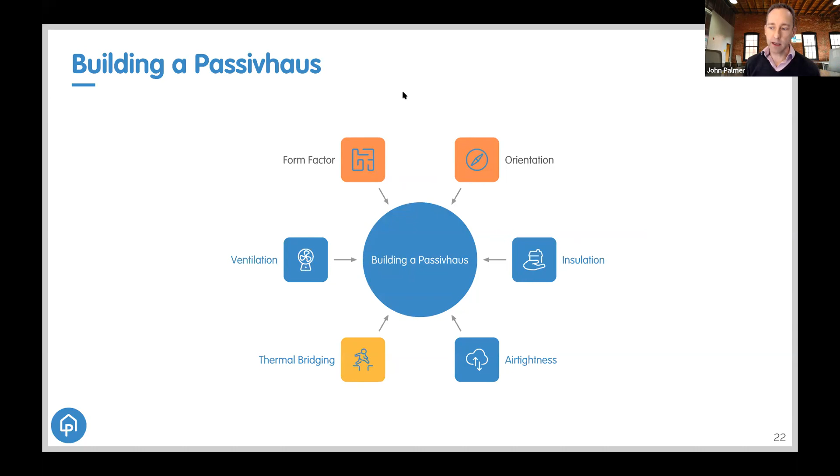What is EnerPHit? Well, EnerPHit is a derivation of passive house, for retrofit, but it allows for some of the things you're going to be stuck with when it comes to retrofit. The first thing is form factor - that's out the window, you can't really change that in an existing building easily unless you're doing some sort of extension. You also can't change your orientation. And your thermal bridging, in most cases, you're going to be stuck with some of it - some you can fix, some you can't. But we can still deal with insulation, air tightness, and ventilation.

So the EnerPHit criteria - here I've put them against the passive house new build criteria - and you can see that you get a bit of an allowance on air tightness, so you can go slightly more, and you get an allowance on heating demand, which rather than being 15 is either 20, 25 or 30, depending which climate zone you're in in the UK. I'll explain what those are in a moment, but we've got 3 separate climate zones in the UK. So that's the heating demand method, and that's still quite hard.

People say the Passivhaus standard is quite hard to achieve. It is, and I won't make any excuse for that. It's probably the highest fabric standard there is, and the EnerPHit side is also quite hard to achieve. There are certain situations where your form factor, orientation, and amount of glazing work against you so much that these levels of heat demand are possibly unachievable.

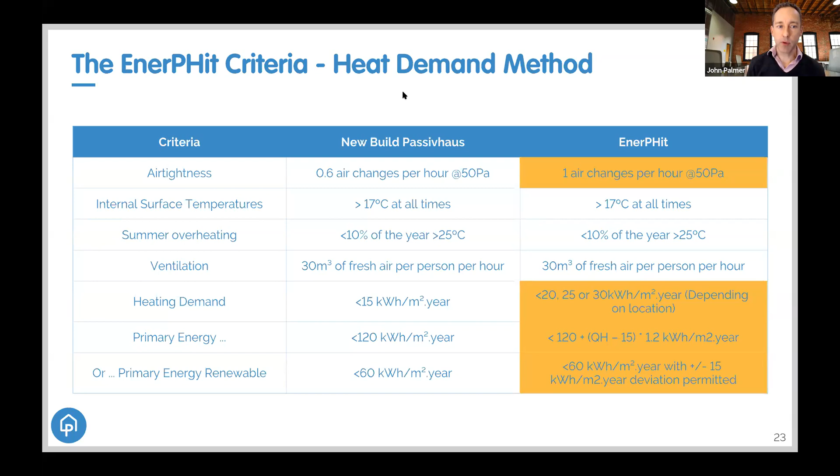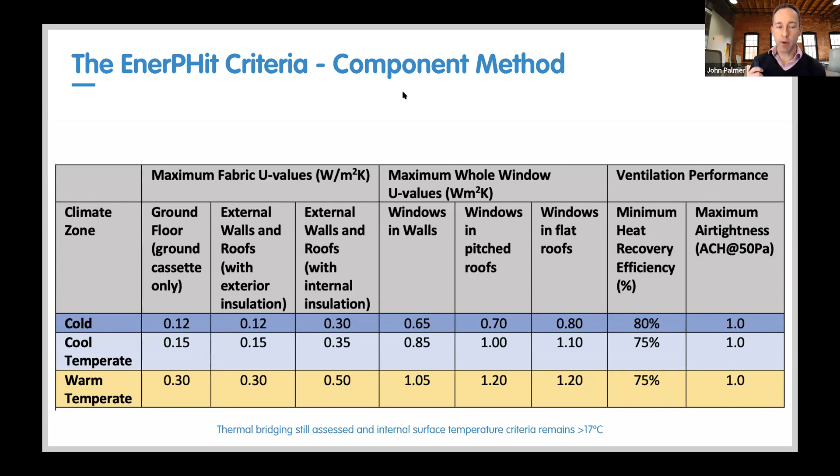In those cases, there is the EnerPHit component approach, which is slightly misnamed because it's actually an elemental approach. For those three climate zones - cold, cool temperate, and warm temperate - you've got elemental fabric U-values, window U-values, and ventilation performance levels. In the background you've also got thermal bridging, which is still assessed, and the requirement that internal temperatures stay above 17 degrees to avoid condensation and mold and improve comfort. This allows you, in situations where the heat demand method won't work, to still go for the component method.

And these are the climate zones - you can see that if you're down in the south west, you've got a bit of an easy ride with a warm temperate climate, but up in Scotland it's going to be more difficult because there's a big chunk of the cold climate zone.

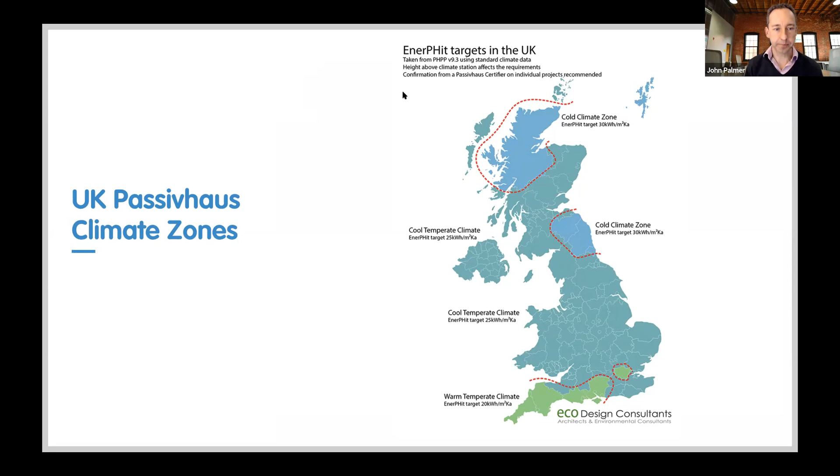So just a couple of case studies to illustrate how this might work in practice. We've got here Zetland Road, which is in Manchester, a Victorian villa, semi-detached, from 1884.

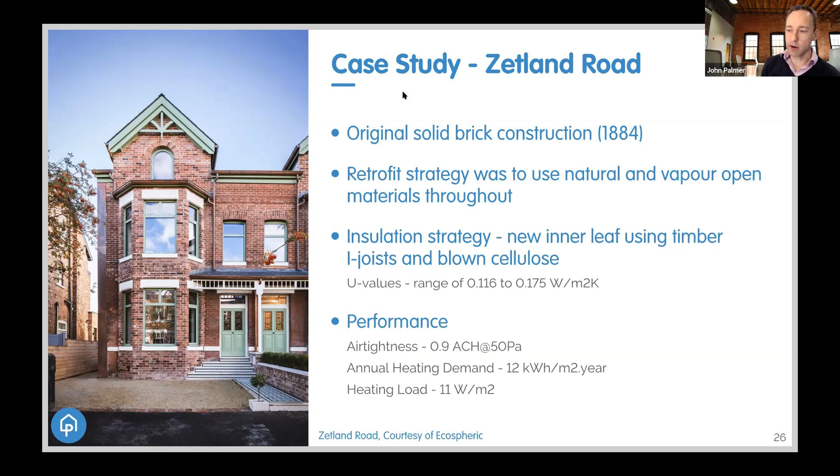Here there's a great emphasis on natural and vapor-open materials. The insulation strategy involved a completely new inner leaf using timber I-joist and blown cellulose, getting the U-value down to 0.116 in some cases. The performance achieved was 0.9 air changes per hour, annual heat demand below 15 at 12, and a heat load of just 11 watts per meter squared.

This is a slightly different project, again mid-19th century, but this one on the terrace. Solid wall, concrete floor, and flat timber roof - a slightly unusual roof situation. Here you can see the materials used are not so natural, more fossil fuel oriented, high performance, possibly because there's more space constraints inside the building.

So aerogel to the front walls, getting us down to 0.16. EPS external EWI at the rear, and polyurethane insulation under the floor. Performance again 0.8, so under the 1 required for EnerPHit, 23, under our retrofit standard of 25 for this particular part of the world, and heating load down to 11.

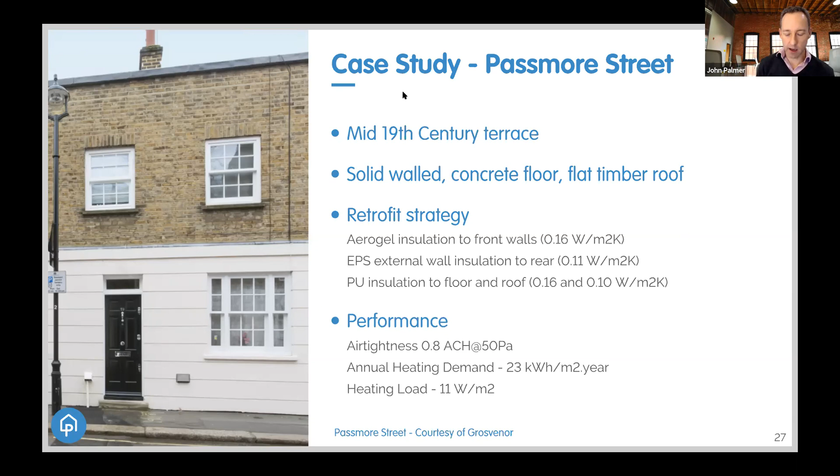I also want to mention that it's not just individual buildings or smaller buildings - there have been several large-scale EnerPHit retrofits undertaken. Cedar Court in Glasgow and Erneley Close in Manchester, and you can see the overall energy demand in both cases was between 70 to 80% reduction from where we started.

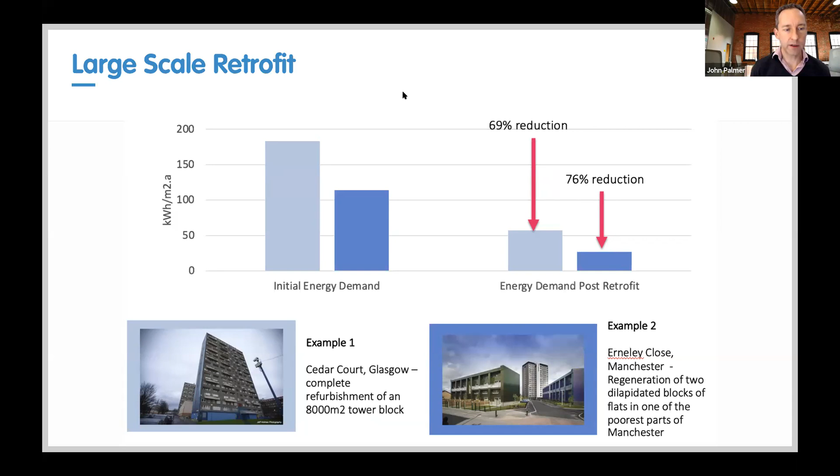So just to finish off, I wanted to put it into context and talk about how far we need to go with retrofit. Obviously Passivhaus and EnerPHit are the gold standard. Can we afford to go there? Do we need to go there? There are some questions here, some of which remain a little unanswered, as to what governs how far we go with retrofit.

We want to get to net zero, that's great. But to get to net zero, there's only a finite amount of renewable energy in the future. In 2050, we will only have a certain amount of renewable energy. Will that be enough to offset the energy we're going to use in our buildings? Perhaps that might not be the limiting factor.

The limiting factor might be our peak load. We're going to have to move all our energy demand, most of which is currently gas for thermal energy for heating and hot water, onto the electricity grid via heat pumps, but still there's going to be significant demand there. Is there going to be enough peak load from all our renewable energy sources and storage devices to deliver that? Perhaps that's the constraining factor.

We want to reduce bills, and is there a payback? Does that start to drive retrofit? Can we get the cost of retrofit down and the desire of people to reduce their bills down? Does that drive it? Cost to the nation.

Every kilowatt costs money - you can either pay to save a kilowatt hour by putting more insulation in your building, or if you don't do that, you're still going to use that kilowatt hour, which means it has to be generated by a wind farm or a solar panel, and they all cost money. By the way, they all have to be replaced every 20 years, whereas your insulation stays in place for the lifetime of the building. So what's more effective? What's the cost per kilowatt hour - is it saving or generating?

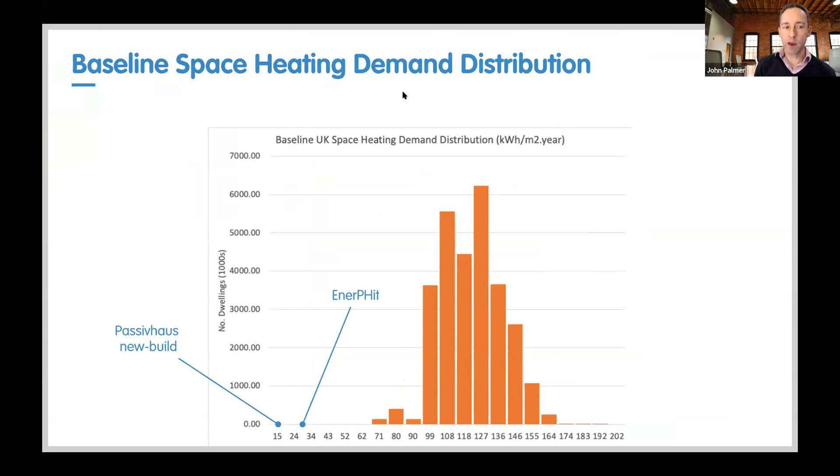So first of all, this is again some work we've done with LETI, and I found this really interesting. This gives you the space heating demand distribution across the UK housing stock. And you can see that we're sitting at around about 120 kilowatt hours per metre squared median, and that EnerPHit and Passive House are right up the other end, 25, 30, all the way to 15 for a new build Passive House. So that's where we are, and that's the scope of where we could get to with a fully fledged deep retrofit across all the housing stock.

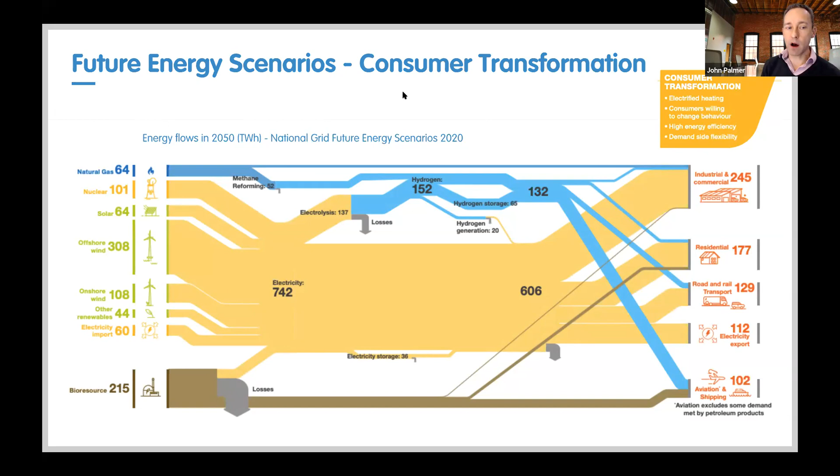Another way of looking at this is from the National Grid's Future Energy Scenarios, a Sankey diagram. And what it shows you is that kind of picture I painted, which is in 2050, we've got all these renewable energy sources on the left-hand side through the electricity grid, driving heat pumps and perhaps direct electric in our buildings. And you can see that residential there is at 177. Our current usage is 480 terawatt hours. So the amount of energy we currently use in buildings is 480 terawatt hours. We've got to get down to 177 for that diagram to work, i.e. for the amount we generate to balance with what we use.

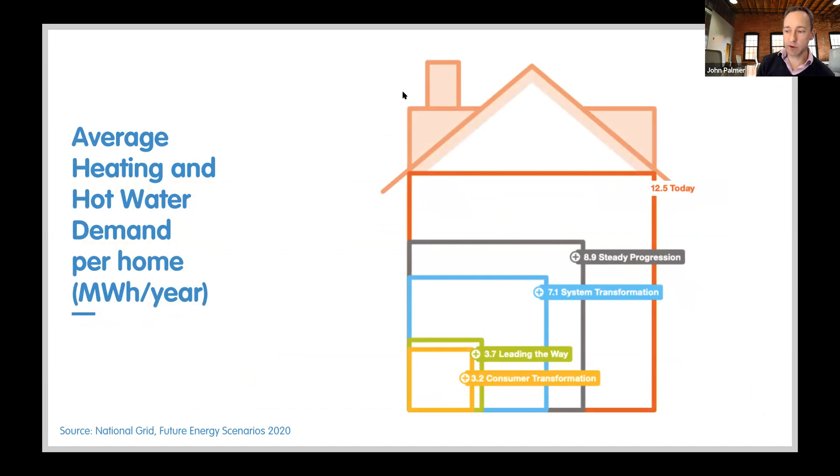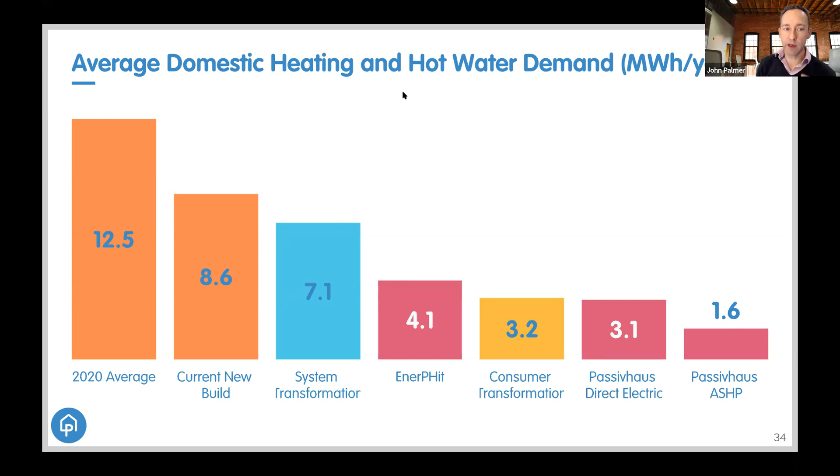So you can see that actually to get down to the sort of levels that the scenarios they're painting require, we need pretty deep retrofit. And some buildings we're not going to get to for tenure reasons or whatever. So actually with those that we can get to, we need to go to pretty much the deep retrofit level. And where are those buildings?

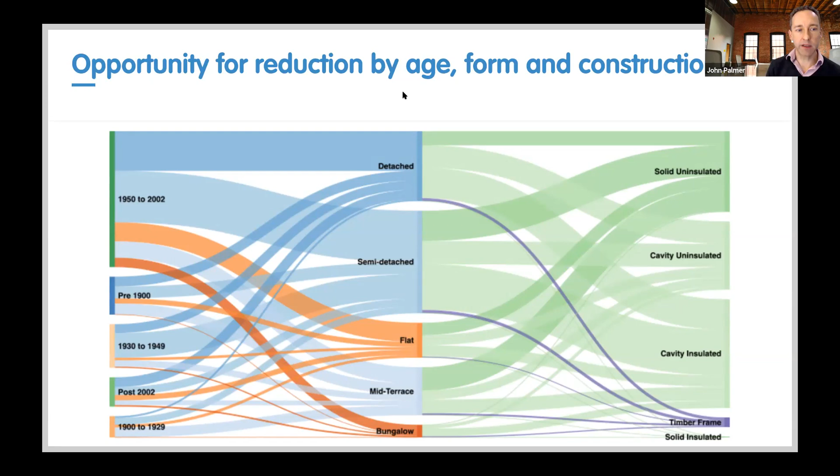And I couldn't really put it better than the National Grid themselves, because this is just one scenario, the electrification. We think that's where we're going. There might be other options in the future, but wherever we go in the future, energy efficiency is a no regrets measure. So it makes everything easier, makes every option easier.